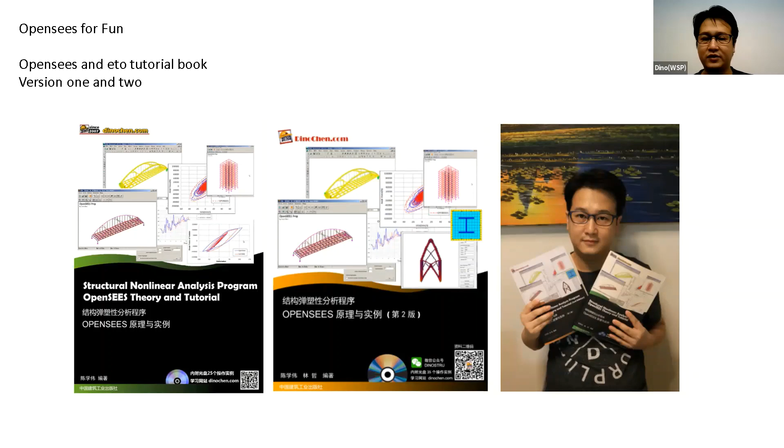In this book, I made a small program called ETO, which means Etabs to OpenSEES, to help students easily build OpenSEES models based on graphic input. It's based on Etabs graphic input and transfers the model to OpenSEES. This is the ETO program, and later I will give you a small introduction to it.

It's quite user-friendly for small scale buildings, and I can do quite a lot, for example solid elements and bridges for civil structure students who want to build large scale bridge models in OpenSEES.

For bridges, I also made a very fun program called the OpenSEES bridge game. You can build a bridge on a grid, similar to some popular games on iOS, iPhone or iPad. It's very useful because most engineers don't know finite elements well, or don't have time to build a finite element program, but they can use OpenSEES as the calculation core.

They just need to build the graphic input or some script to build the model, using OpenSEES as a core. They can build a lot of other functions like this bridge game I built.

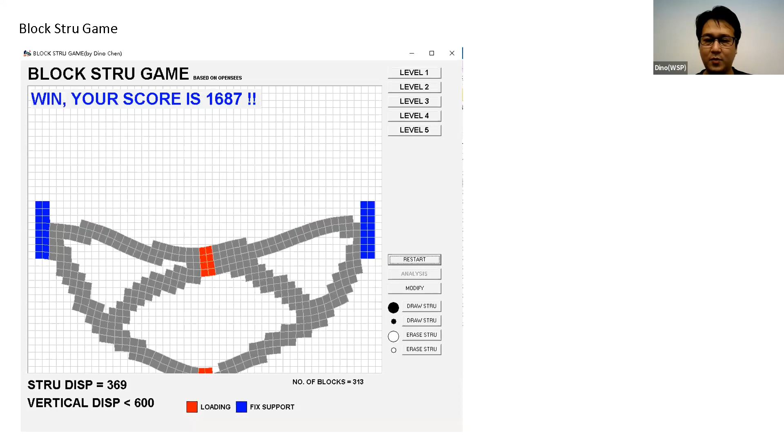Based on this theory, I made another game also based on the OpenSEES core to try to make this topology optimization program. But this is a manual topo program, not automatic, though it's quite useful to introduce students to the theory of topology optimization.

For example, this one has a point load added at the top, and the base two points are fixed supports, and this is traditional 2D topology optimization. This program is based on the block structure program, and all the calculation is based on OpenSEES, with no need to compile in C++. We just use the original OpenSEES script to form this program.

It's quite useful for you to do some fast study in structure. For example, I use this to optimize the outrigger in the high-rise building to gain the largest

stiffness based on the limit material. This program is also built in based on OpenSEES, and this is quite interesting.

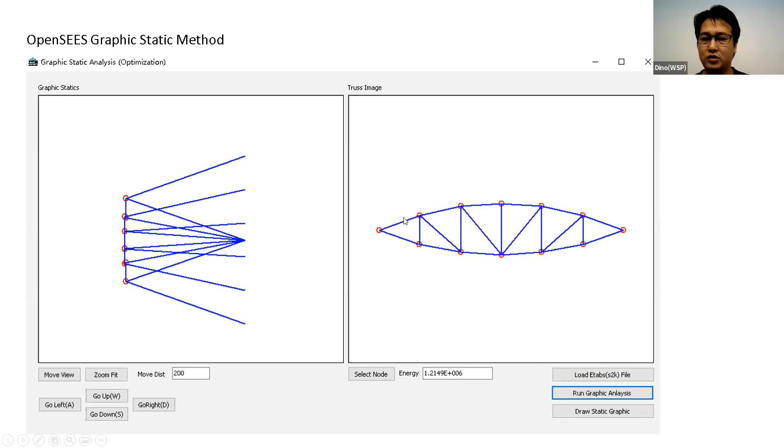So I will close this PowerPoint to show you the program I wrote and introduce some detailed theory behind the program.

Okay, for example, I'll show you the bridge game. This example, the ETO, I will introduce later. This is the bridge game, you can see that - oh, it's quite small.

In the graphic you cannot see the OpenSEES window, but actually when you build the bridge based on the graphic, the program will auto-generate the OpenSEES model. So we draw some truss here.

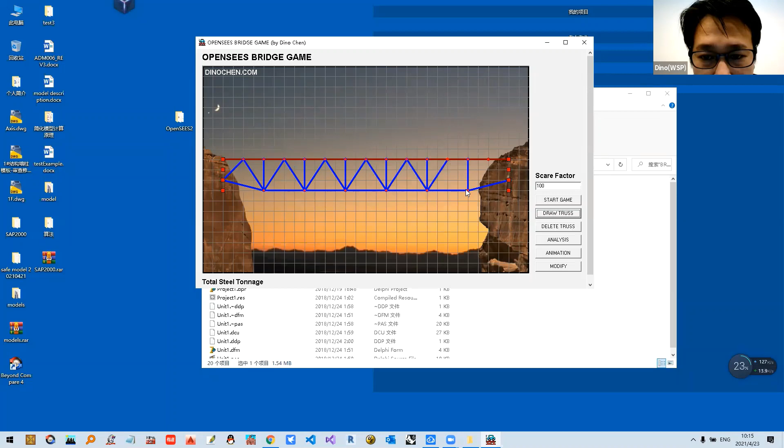Okay, and then we press analysis, and after pressing analysis, the program will run in OpenSEES. You can see this is the TCL file the program generates, and press analysis. You can see it's like a game - a bridge game based on OpenSEES.

And the theory is, when we press design and press analysis, the program will generate this TCL file. The model will generate the 2D node coordinates. The fixed points - these 4 red points are the fixed points. Then it auto-generates the information of the members, using the elastic beam column element.

And then we apply the loading. Actually, the tricky one is the loading assignment. For example, for this car going from the left to the right, the loading is applied as a point load starting from the left.

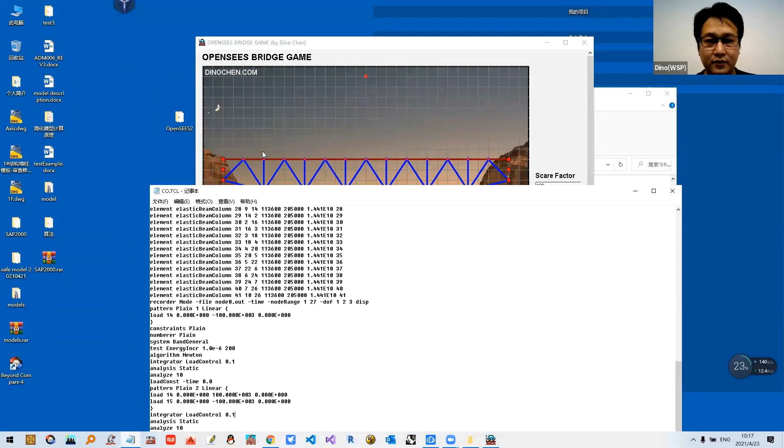Yeah, from the left here. We apply the point load at the left point, and then we apply the uplift load at the adjacent point or adjacent node, and then we apply the loading.

Each time we just shift the loading from the left to the right and iterate, and this is the loading pattern applied for the bridge analysis.

After you apply these several cases of loading, each time step we run the analysis, and then we collect the deformation data. You can see this one.

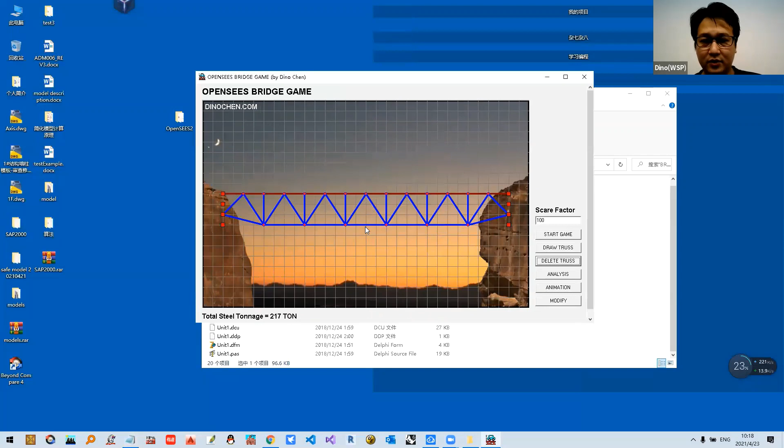This is the information of the result. You can see the record file is here. We just collect the deformation across all the nodes, the deformation of the 2D, so DOF 1, 2, 3. The final result we display on the program and show this animation.

So the theory is quite easy. It just runs, for example, for 20 nodes it just runs 20 linear analyses, capturing all the deformation at each time step and displaying it on the 2D canvas of the program, making this game.

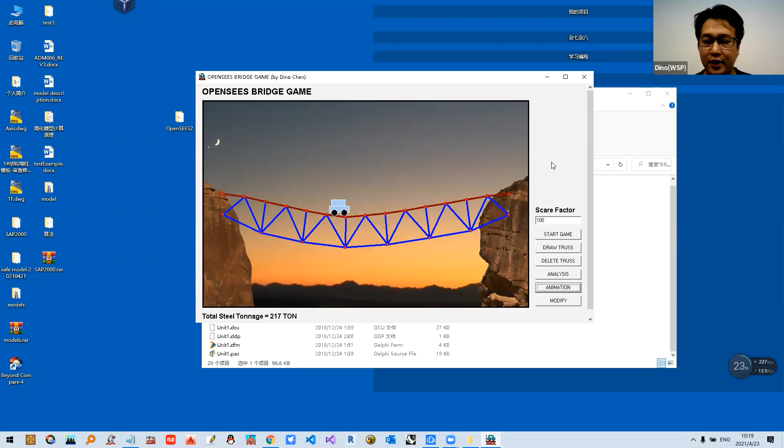So it's quite fun to make this one. It's quite easy to show how to use OpenSEES as a calculation core to make a 2D analysis program, including static analysis programs of all kinds. And this is the bridge game.

So, how about the block game? The block game is quite easy to use. I'll show this one.

This is quite a large program for OpenSEES, because for this program we use the shell element for each pixel of this canvas. For example, I set several levels for the game. This is the cantilever - the blue one represents the fixed joint of the member, and this one's the loading. So these 6 elements apply the vertical loading as a point load to form this structure.

So at the very beginning, I draw a very simple cantilever by dragging the mouse to draw this cantilever. It's quite easy. Then I press analysis, and you can see the program generates a lot of node calculation information. Close this one - I'll show you another program based on this.

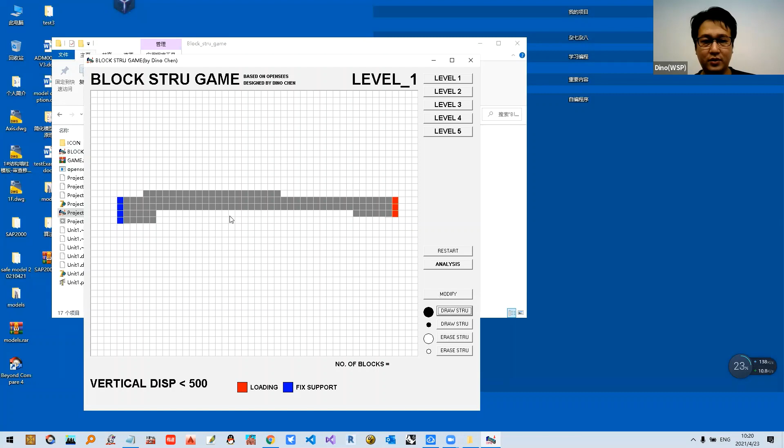Yeah, based on this one, this will show you the process. Will not delete the joint. Okay, I draw this cantilever and then I run the analysis.

You can see the OpenSEES run. This is the deformation of the structure, and we can see this is the result. We generate a lot of node deformation, and this is the script auto-generated by the program. You can see that most of them is the node location.

It's quite a lot of node information because it depends on the grid. For each member, you can see that it's a pixel in the graphic, but actually it's the four node shell element here. And then we have the fixed joint is the blue one, and any joint in this canvas we don't use.

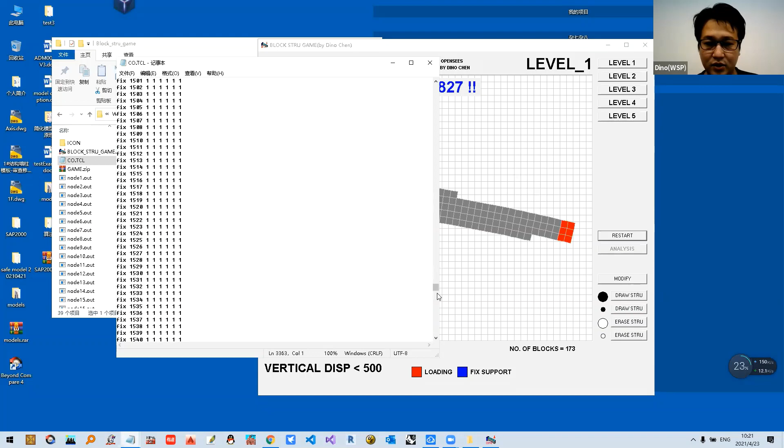We also assign the fixed joint for easy to program. And you can see that some part defines the pin joint, which is the element we use. We use shell MITC4 for all these elements, and then we record all the deformation of the nodes. We apply the loading at the red point, and then run the linear analysis. This is quite a long script, but it's very easy to understand this part, the analysis theory.

So how to build this model is just use the brush. It's quite fun here. You can teach students how to use the brush to optimize the structure.

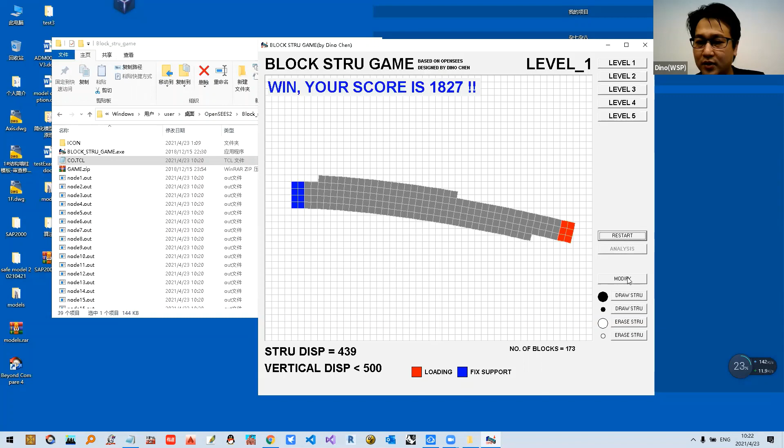I'll show you a much more complicated structure. For example, I clean all this one. You can use the eraser to erase the member.

Okay, for example level 3, this one, we can draw the truss structure like this. This is the structure, but the loading, I think, is horizontal. No, the vertical. Let's run the analysis.

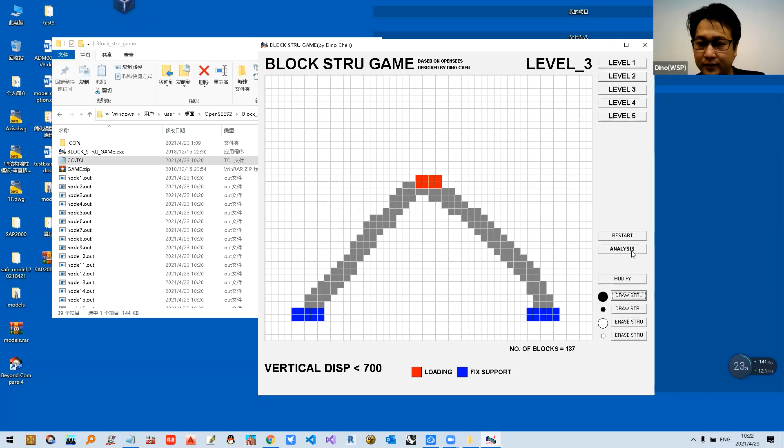You can see this is the vertical point compressing this point, and the structure deforms like this. So we're not satisfied with this deformation, so we maybe add two truss members like this. Just for example, it's not optimized.

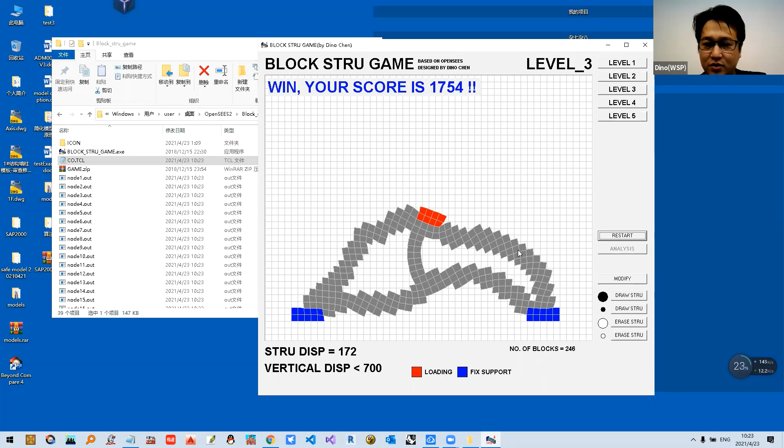Then you can see the score is calculated based on how many pixels you use for this structure. Now the score is 1754. I think it's not okay also, so maybe we draw more structure members like this.

This is the process of how to use the brush structure. We can also understand this as handmade optimization. Use the menu, and this is a block structure game.

Based on this theory, I transferred the program to be the Topo optimization program like this. And this is the model. It's much larger than that one, but it's the same theory.

We just run, for example, 0.01. This is the reject ratio for the member. This red point is the horizontal load ending point, and based on this, two points are the fixed point of the structure.

So at the very beginning it's like a shear wall, a 2D plate structure. We apply one point load and review the lower stress area. After we press Read Stress, we can read that this is the high stress zone, so we cannot reduce for this 3 point, but in the middle we can reduce because it's a low stress point.

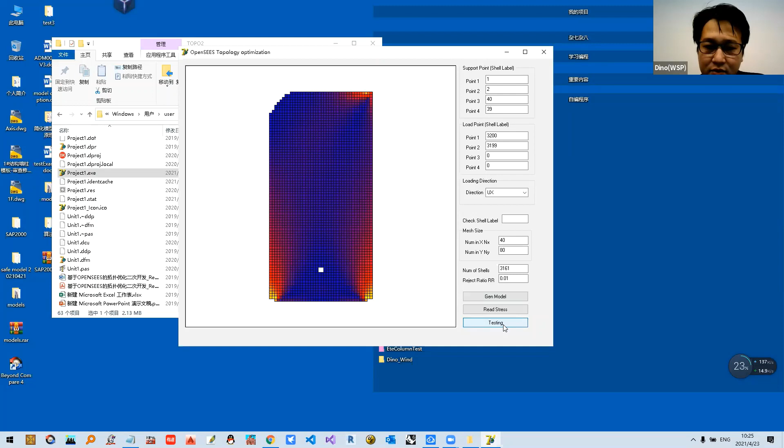And then we just double click testing. It will reduce the shell element. You can see that this is the lump sum of the shell element. And then we can increase the reject ratio, and we'll do it again and again.

I can show you the final result of the Topo analysis. This is the story script document for this program, but unfortunately it's in Chinese. I have no time to translate, so I just open this PDF.

You can download it from my website. It's quite detailed, describing the theory and also the script.

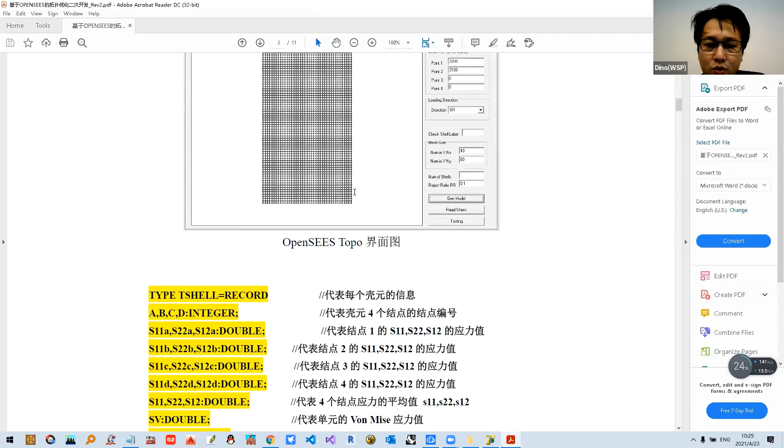At the very beginning, we just build like a shear wall structure with a lot of elements. The element should be very small because we need to use the average stress to represent each element. So for this program, I used Shell MITC4 also.

And then this is a regular script for the linear analysis. We just need to know the topo procedure of the analysis. We generate the OpenSEES model, we run the OpenSEES model, and make the TCL file.

And then we read all the element output, meaning the stress of the element. We combine the stress to be a Von Mises stress, and calculate the maximum stress, meaning the Von Mises stress of the element. We check the element's stress limit, and we calculate the rejection ratio of the max stress.

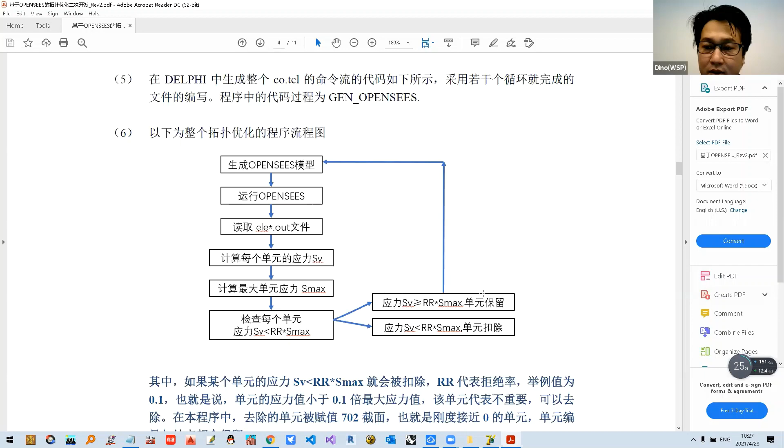For example, at the very beginning, you can see that the ratio is 0.02. It means we calculate all the members to gain the maximum stress, for example, like 10 MPa. Then we calculate the rejection ratio of the maximum stress rate stress, and check the stress limit, like 0.1 MPa. So for each element, if the stress is lower than 0.1 MPa, the element is considered to be reduced, and the other parts remain. So we just reduce the element, and after several steps, we can gain the topology optimization shape. This is the whole process.

We apply the point load at the top and the middle point, and the base is fixed support. Then we run several steps and gain this result. Finally, we gain the topology shape like this. Yeah, and this whole procedure is based on an OpenSEES script, no need to compile a C++ program.

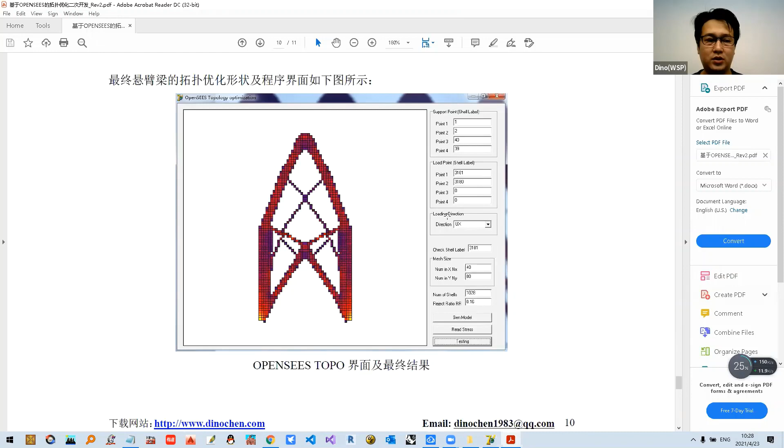Okay, and the other part of the fun program I introduced is the graphic static, I think it's here. This is quite useful for high-rise building or long-span structure analysis. Let's see. Yep.

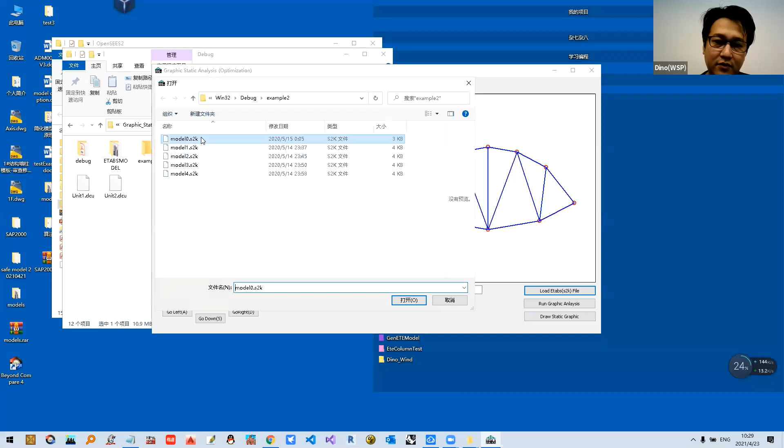At the very beginning, we also used OpenSEES, so we keep the code file here, but it's quite easy because it's 2D truss analysis. So at the very beginning, we also used ETABS to be a graph input. For example, like this truss, but this is not a regular truss. Yeah, this is a regular truss.

I think you can use YouTube to find the graphic static theory. It means using the graphic to calculate all the internal force of the member. Actually, at the very beginning, it's a very easy method to calculate the actual force for the member. But nowadays, because we have the finite element method, the truss internal force is very easy to get by the program. But this method is still useful for structure optimization.

So for example, for this normal truss, we can run the graph analysis and gain the graphic static figure. And as for how to use this for optimization, I can show you. For example, for this truss, you can see that we make sure all these lines represent the axial force value. The direction is the vector, but the value is the length of this one.

And you can see that this is the optimization of the truss. For example, if I use this one, set this point, yeah, the normal truss is like this. Sorry. Yeah, this is the normal truss. When you run the graph analysis, you can find that the total length of this axial line is a certain value. For example, you can call it the energy factor, which is 1.229 here.

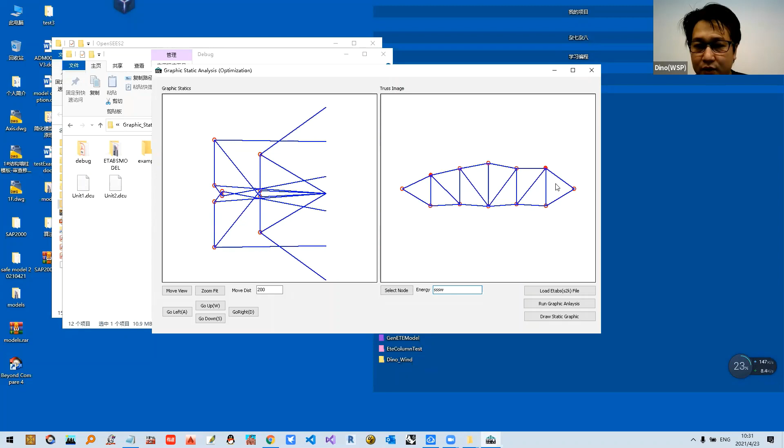So this is not the optimized shape. So we try to move the node of the member, for example, to reduce this one, and make this middle one higher. Change the shape like this, and we can gain another graphic. So you can see that the graphic is squeezed already, the graphic static figure is squeezed already, and the lump sum energy is reduced. So it means this structure is much more efficient than the one before.

So we try to use this one to make the truss optimization tool. Actually, at the very beginning, it's based on OpenSEES to try to make a demo or beta version. After we confirmed the theory is okay and easy to use by the engineer, we transferred it to be the program itself. We rewrite the analysis code, we don't rely on OpenSEES now. So this is the application of OpenSEES.

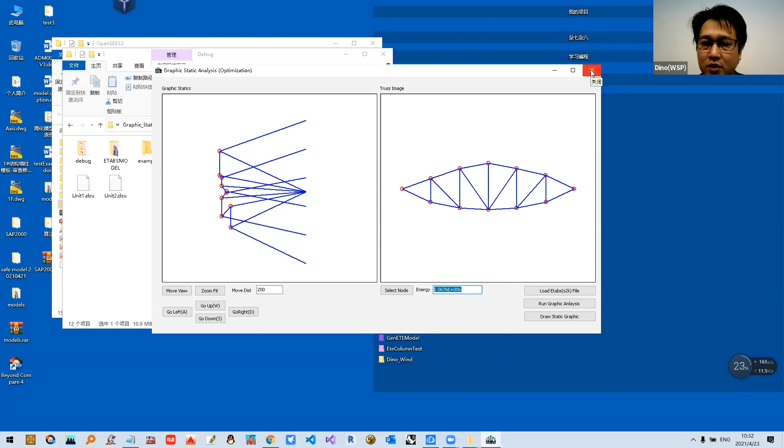Use the OpenSEES script. So, and the other part of the introduction, I think the most important is to introduce you to the program called ETABS. Actually, for most projects, even in China, Hong Kong, I think maybe in Europe or the USA, the program called ETABS is quite popular. I think it's worldwide popular, this program.

And then we try to use ETABS as the operation system for OpenSEES, because you can see that the OpenSEES program is most likely a script writing program for students to run specimens or run tests, like a seismic test or loading test for the specimen. I think it's quite easy to build a model because the model itself is simple.

But for the structural engineer, we need to build a very complicated model, at least several story building. It's very difficult to build in the script. So at the very beginning, we try to use SAP 2000, but at last we transfer to Etabs because Etabs is much more popular and most engineers know how to use it.

So I'll show you how to run the ETE program based on Etabs, from the Etabs model at the very beginning. If you want to use the version of the ETE, you can download it from my website. I can show you the download address, press OpenSEES at the very beginning.

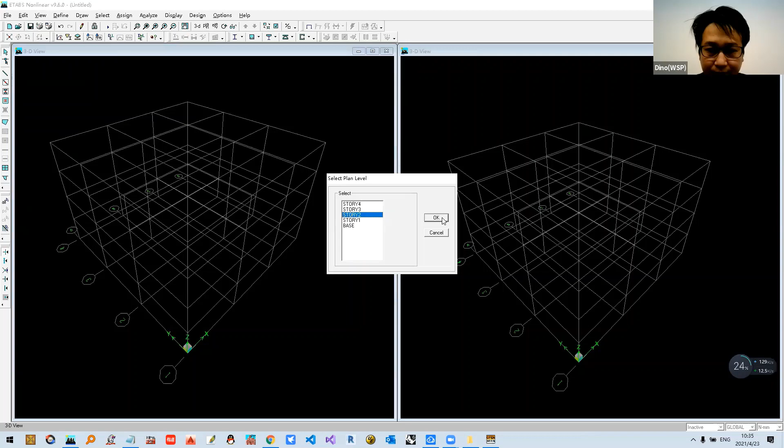So I build a very simple frame structure here, using the default setting with several grids. I build this using the total graphic input for Etabs. Okay, concrete section. So I assign the section to be the concrete section.

Actually, we need to use an elastic member, so we call the E at the header of the section, to automate changing it to the elastic section. Assign the column and the beam, and then replicate to the other floors.

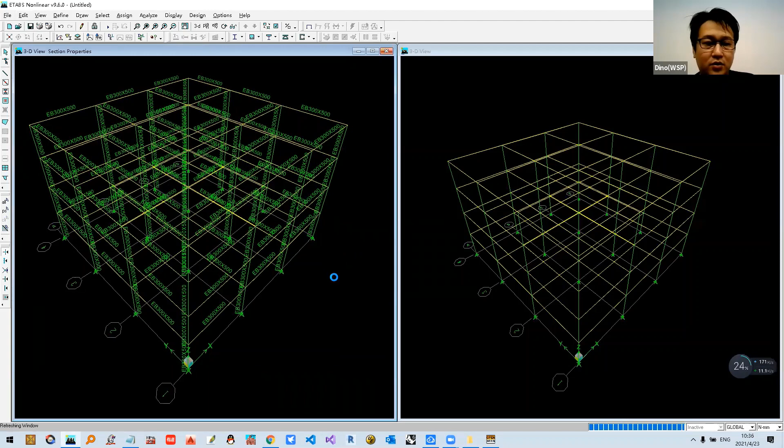So the building is built already, and then we assign several point loads as a push load. I create a load pattern called push, then apply the point load as a push load at the top, for example 100 kN. Okay, and the model is built already in the graphic input.

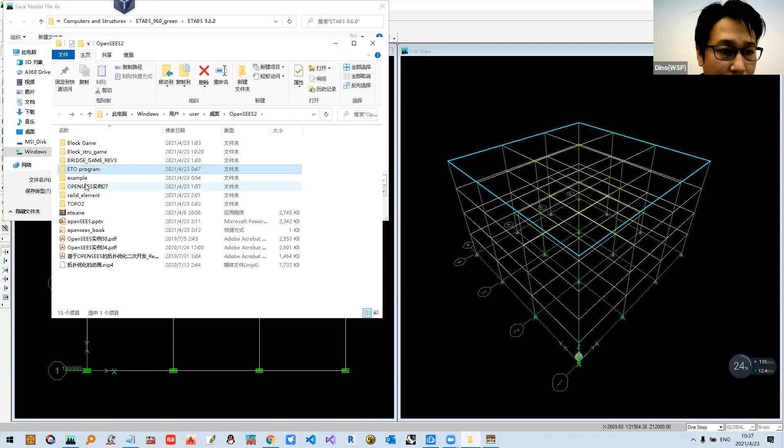It's quite easy, and then we save the model first. For example, save it here. Be careful, we need to export not the E2K file, but export the SAP 2000 S2K file. And then we save here as S2K - this is a very important file, because we import using the S2K file, and then we import this S2K file.

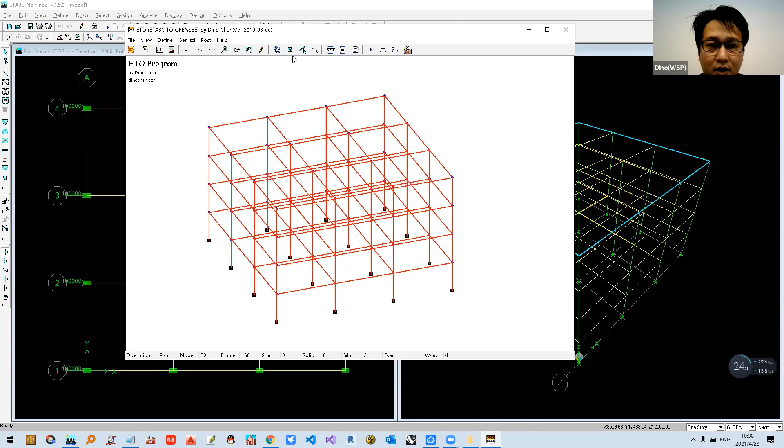This imports from the Etabs model, and then you can rotate the wheel to show the 3D shape of the building. You can also show the node number - it's quite important because we need to know the node number, and we need to know the frame number.

And this - we know that for OpenSEES, the local axis is quite complicated, we use vectors, so we also need to know the vector of the member. This is the vector - we describe the section rotation, section angle for the member in OpenSEES. But don't worry, we will try to handle this.

We use ETO, we will transfer this local axis automatically, and we try to use the fiber element to define the fiber element here. But at the very beginning, we do this tutorial using the elastic model, so we can select the elastic beam to describe this element. So you can see the element label - this is the element.

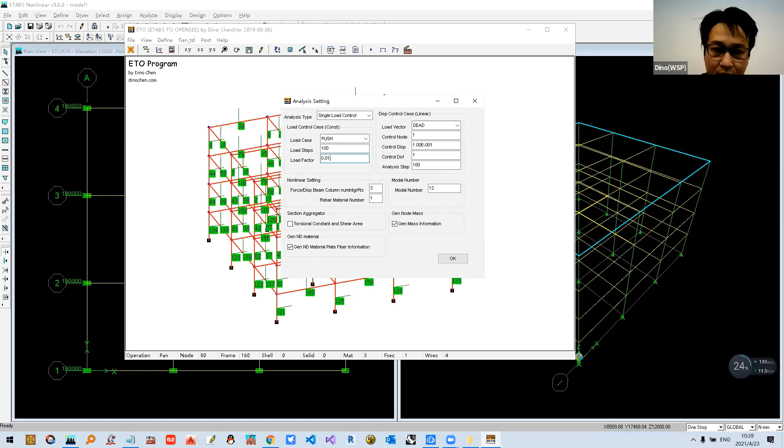And then we set the analysis case - actually for me using ETO, I will use the tcl file to modify this part, but for the beginner user, you can use this one to auto-generate the analysis tcl script. For example, push load 100 steps, this is the load factor for each step, like 0.01. Then press OK, and you can press this text file and auto press generate.

You can see this program will gather the information from Etabs to generate the information for OpenSEES. This is the model basic data, node information and mass information, auto calculated by Etabs if you need to run the dynamic analysis. And the fixed or pin connection of the support point is also transferred from Etabs, so you can define fixed or pin support as you want in Etabs.

And this is the elastic member description, the material, and the shell element - with shell element for the wall and slab, we transfer to the ND material automatically. But in this example, you don't need to use that. And this part is much more complicated for the beginner - it's describing the section rotation or section angle for the 3D section.

We transfer to the geo transform linear for each member. So if in this model there are 1,000 members, there are 1,000 like this one description, but for the computer it's quite fast to input. And this one is the member description - we can transfer this one to be a nonlinear member.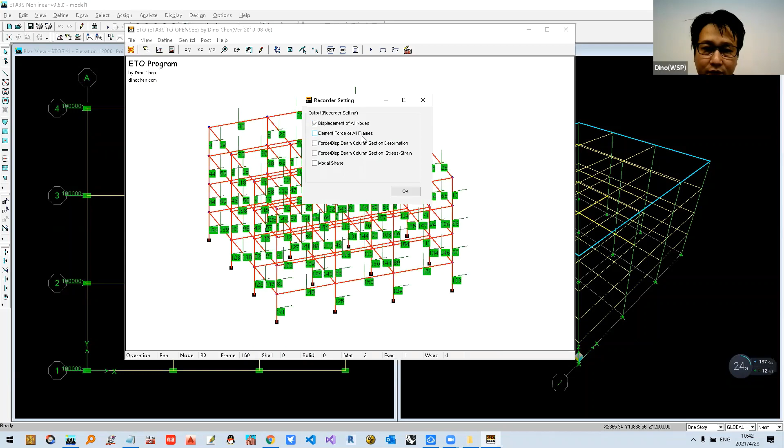And then after that, we could record the file. For the output, we can see that we just click the deformation for all nodes. We also can generate the element force for the frame, and the other part you can handwrite for the other recorder you want. And the push load is transferred from ETABS. You can see that in the X direction, apply 100 kN for the top 4 points.

And then the other part is the analysis script you usually use. This part you can modify manually, by editing the text. So you can generate this. After generating this one, we can save, select all to save the text file. For example, you can also press save file to the script.

And I'll show you how to run this script. The thing is, the OpenSEES program. For example, you see that this script is generated from that one. I just keep 100 time steps for this analysis.

And we can use the program ETO to plot the deformation also. We can import the model here. And then we run. Yeah, maybe this is not the same model again.

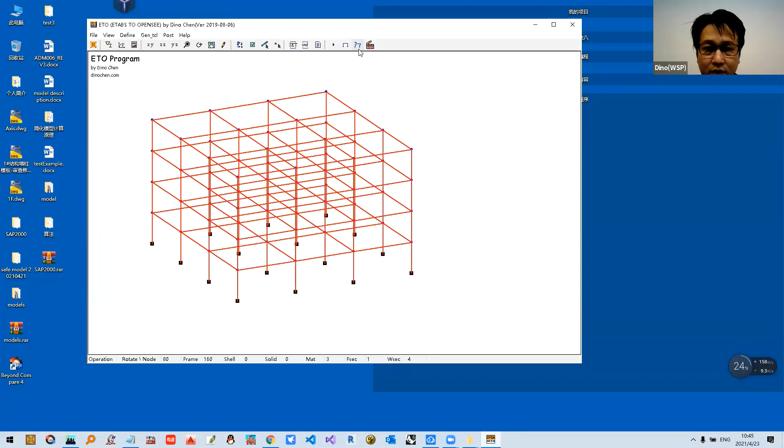For example, we read the deformation based on the node output. Time step is 100 maybe, and the scale is 100. Just for example, yeah, so it's not big enough.

Yeah, this you can see the deformation. The scale is 10,000. Okay, also you can show the animation.

This is a new function I added recently, and time step. Yeah, it's okay. And then not here. It's quite... you can see the animation.

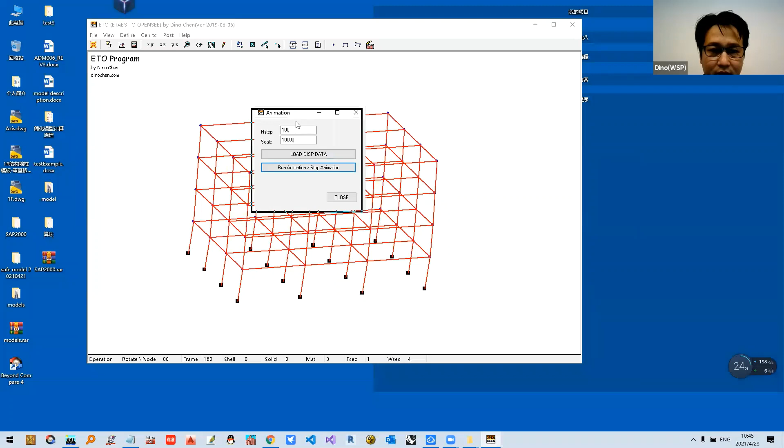For the presentation, like in a paper or PowerPoint, to describe the information in the research, I think this is a useful tool for them to do the post-processing for OpenSEES.

Also in this program, I can also show you ETO's other functions. I think it's most likely for the geotech student, the research of geotechnical analysis. They mainly want to use the solid element for OpenSEES, not the frame element we use for structural analysis.

This one can also do it, but unfortunately ETABS cannot model the solid element, so we need to use SAP2000. You can find the example here on the website.

Not this one, sorry, I think it's 30. Oh, I'll show you the website. Solid element, I think the sample is...

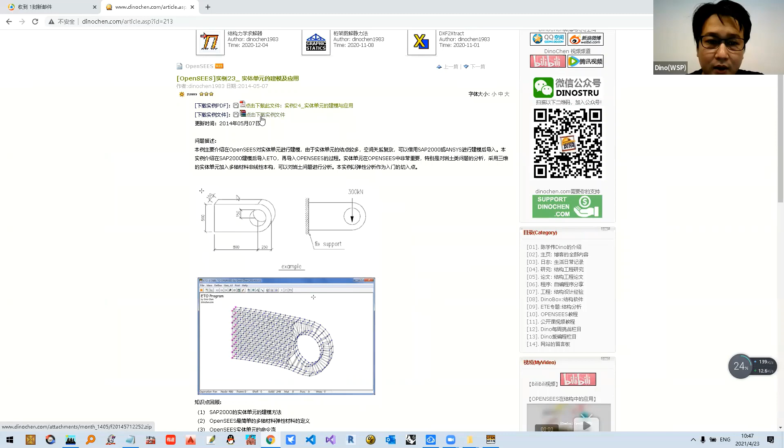I see. Okay. Yes, 23. I can show you the PDF.

Oh, I see the scroll bars here. There's quite a lot of different types of analysis in the textbook.

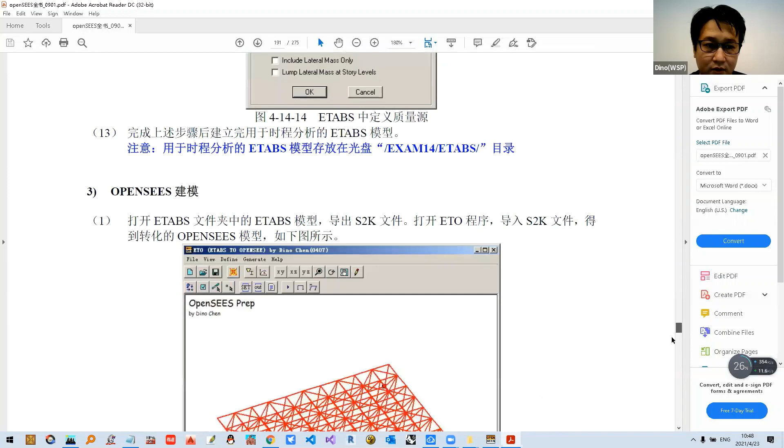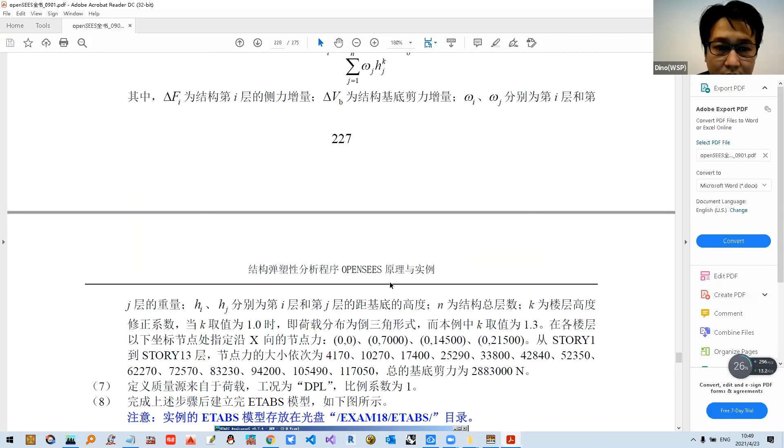18. 21. Yeah, 23. Okay, in SAP2000.

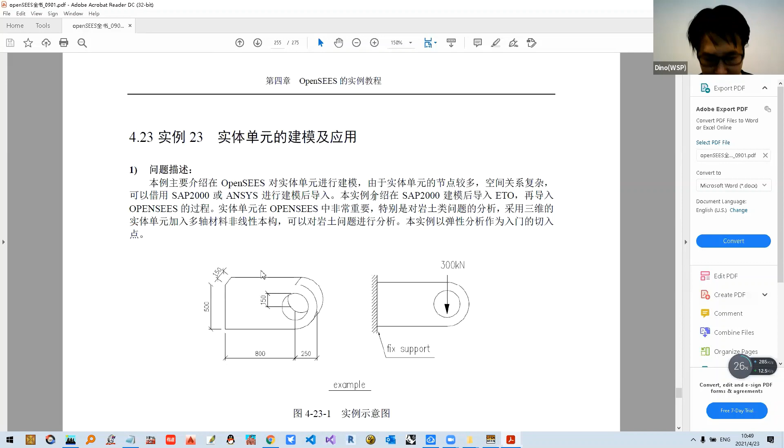Yeah, this is the problem description, and we need to run this solid element analysis, applying 300 kN on this point. This is the solid element.

We use SAP2000 to build this model, and then we transfer it to ETO like this, and then we also generate the model by ETO.

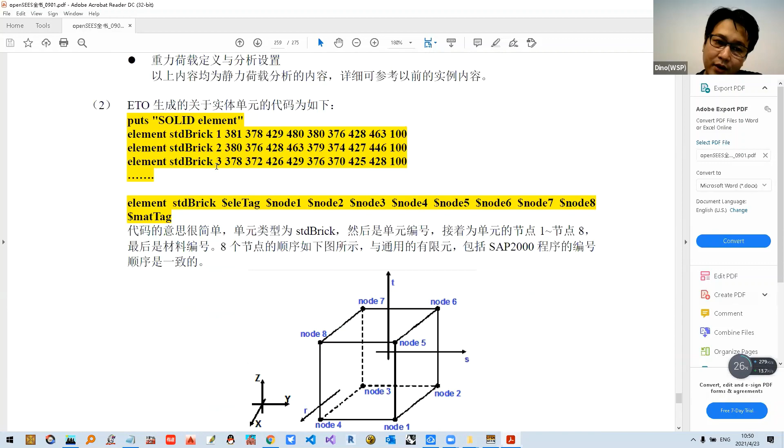In this model, we use the STD brick element, which I think is an 8-node element, and then run the linear analysis to try to make OpenSEES be like Abaqus or ANSYS program for running solid element.

But also this one can be used in geotech research, because geotech also wants to build quite a lot of solid elements, and I'll show you how to use this case.

I think here, yeah, at the very beginning we use SAP2000, and then we have, sorry, here, solid element. So you can see SAP2000 is the... I can show you SAP2000.

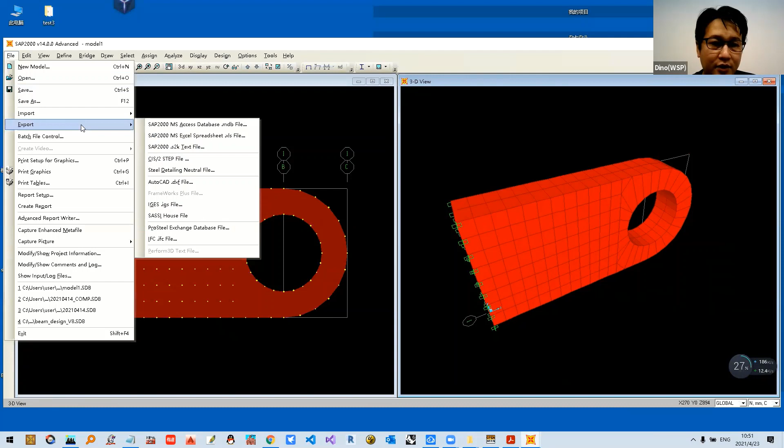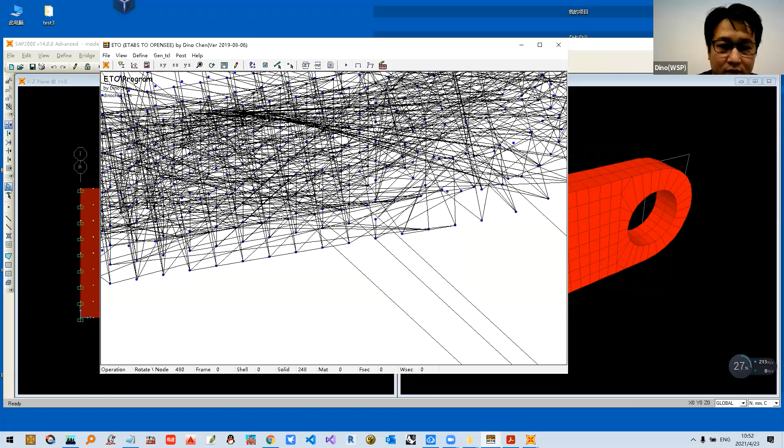Yes, okay, yeah. Then we set another version, SAP 12 for example, and then we import from the model. Oof, I think something's wrong here. I think it's a unit problem. And then we just describe this example.

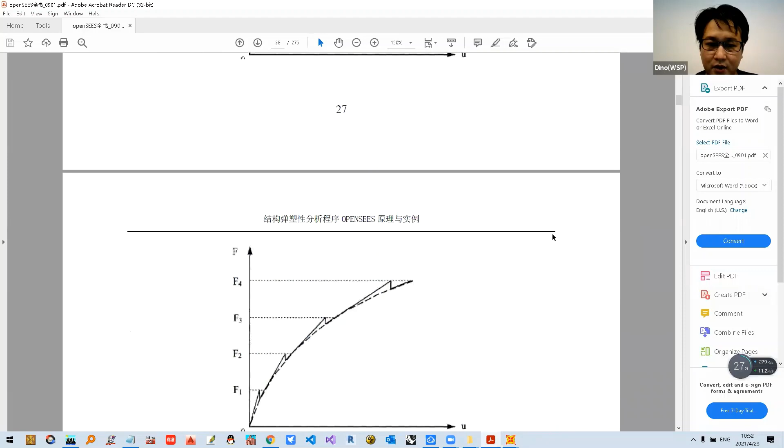Okay, and I think the presentation is most like this. Can show you some pictures, because this textbook is in Chinese, but I can show you the pictures from the tutorial of this book, my textbook. For the very beginning, there is some basic theory of OpenSEES, especially the nonlinear element. It's like a normal textbook, but after this part, chapter 3 introduces the ETO program to introduce how to build the model in ETO. And this is the introduction.

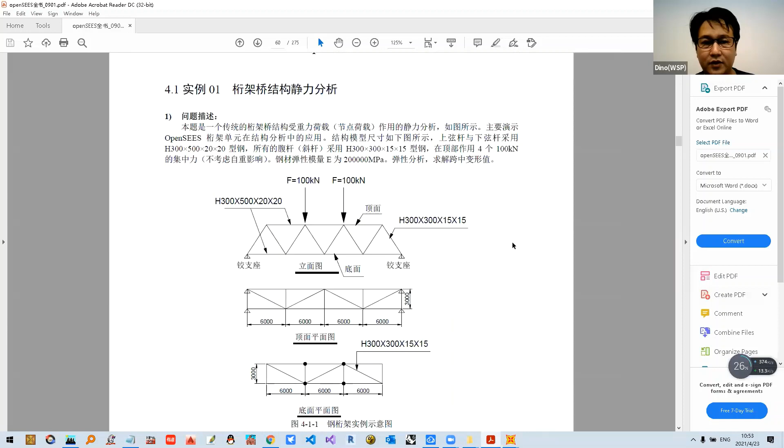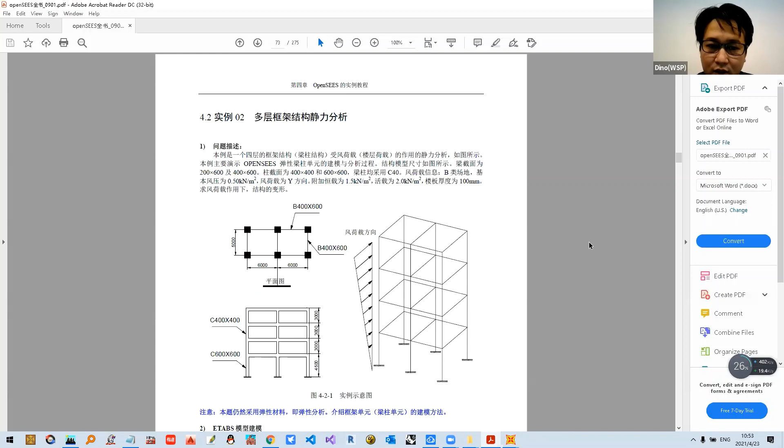And at the very beginning, we have tutorials from 1 to 20. I think now the textbook is up to 35. So in the textbook, tutorial 1 is the truss structure, like a bridge truss. Tutorial 2 is the frame structure for elastic analysis, and also teaches how to use the rigid floor diaphragm in OpenSEES.

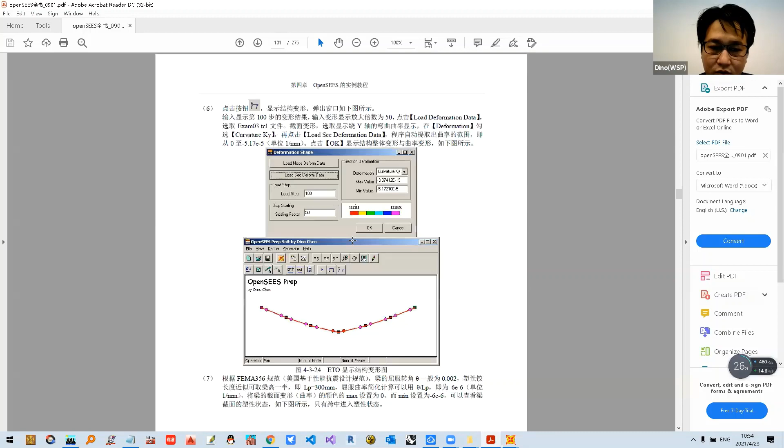And then we teach how to calculate the local axis, or also called the local vector, for the section rotation. And then we have the plastic hinge model for simple beams, a simple support beam, but it's nonlinear. We show how to model the plastic hinge.

And for examples 4 to 6, I think it's the frame structure, including pushover analysis for the frame structure, and nonlinear analysis for pushover to generate the pushover curve. Example 5 is modal analysis to find the natural frequency and mode shape for the building, also using ETO.

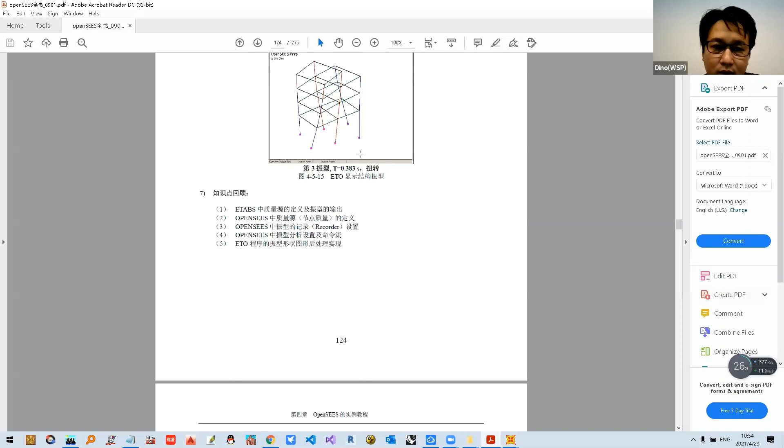And tutorial 6 uses time history analysis, but it's an elastic model, to run the time history analysis and teach students how to import the time history ground motion data into OpenSEES and define the damping ratio for the building. Here is the Rayleigh damping theory.

And example 7 is the critical one, the nonlinear time history analysis example, also based on ETO. And then example 8 is a pure steel structure, like a structural brace. For the brace, we consider the

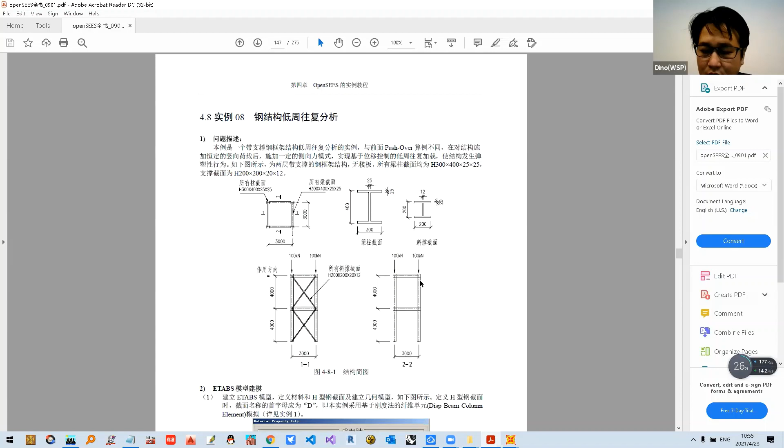geometric nonlinear behavior. So you can see that we divide the member into pieces. And then we try to introduce cyclic loading, push and pull, and run the model considering geometric nonlinear and non-geometric nonlinear.

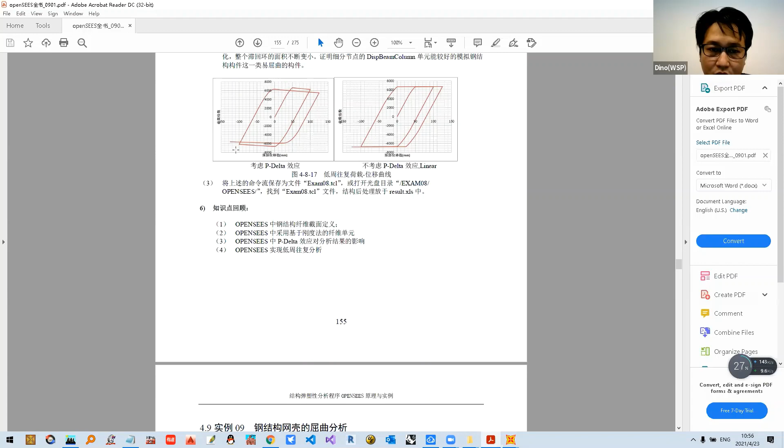And we also try to introduce using OpenSEES as a geometric nonlinear analysis tool to run the large deformation analysis for members like a shell truss. This is the shell truss; we can find the jumping buckling.

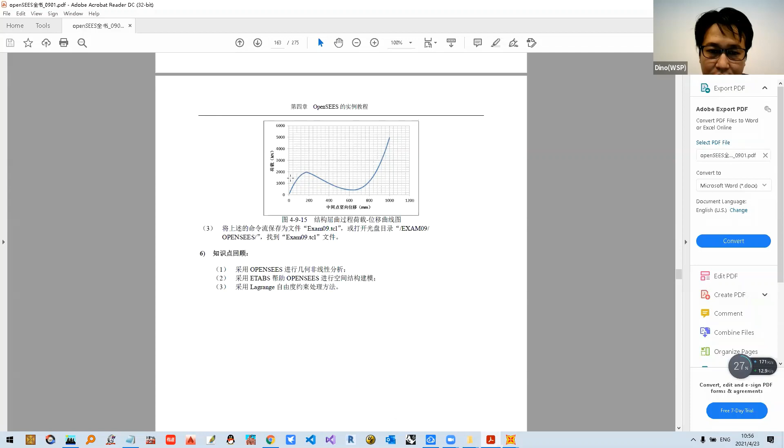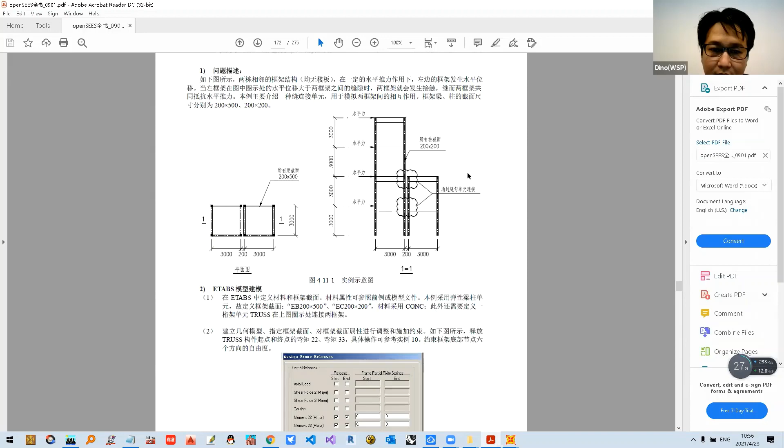We also introduce some very simple nonlinear members, like only compression or only tension link or truss. This is for a foundation, only compression link. And for the gap, we also introduce how to use the gap here. And to introduce how to use the hinge in OpenSEES, which is quite different between OpenSEES and Etabs/SAP2000 for how to treat the hinge situation.

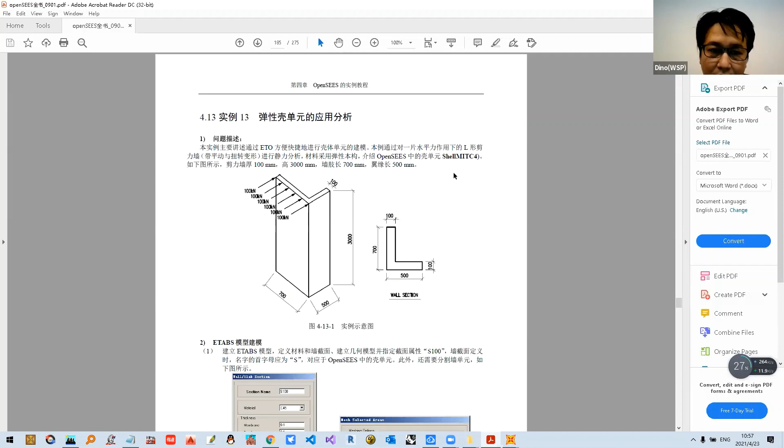But we can use ETO to very easily model the hinge, the pin. We also teach students how to use shell elements. This is the elastic shell, I think it's MITC4, and build a very complicated truss model using 3D truss, which we call a web truss in China.

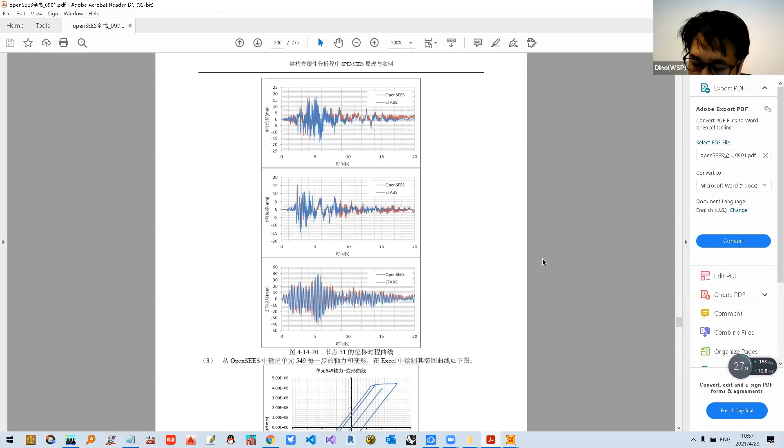It's quite common. In this model, we also introduce 3D, three-direction earthquake loading, like UX, UY and UZ, to run linear and nonlinear analysis for the space structure. And also the prestress beam, using OpenSEES prestress beam, and the bridge.

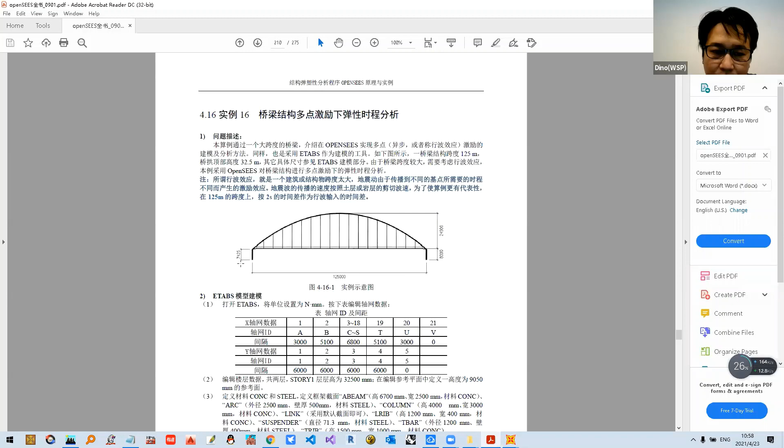And from this one is a civil structure like a bridge, this is a long span bridge. We consider two joint supports with different excitation, so we modify the earthquake input transferred from one point to another point, with a different start time.

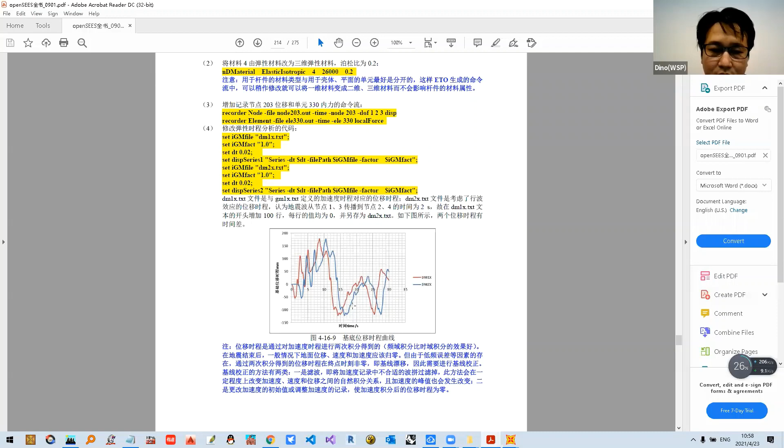And then we have this complicated model, also built in ETABS and transferred to ETO. So even this model can be run in ETO by transferring the script from ETO to OpenSEES. This shows the two deformations of the two supports, modeling the base displacement starting from different points. It's quite complicated for this example.

And we use shell elements, and this one is the displacement-based nonlinear beam-column element, to model the shear wall. It's not the... sorry. Okay, and the shear wall.

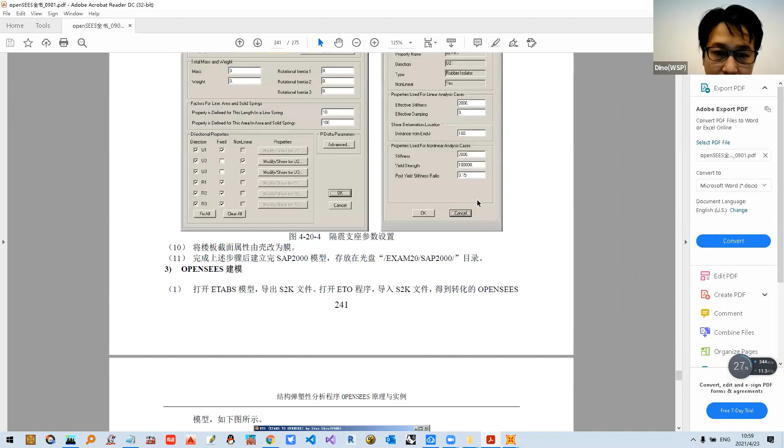This large-scale model is to build the frame shear wall structure. For example, you use the ETO to build this several story building and run the pushover curve. We compare to Perform 3D to make sure the calculation is correct. This example is for a building using a viscous damper.

The other part is comparing with Etabs, using a viscous damper. And the 20th example uses the isolator in OpenSEES.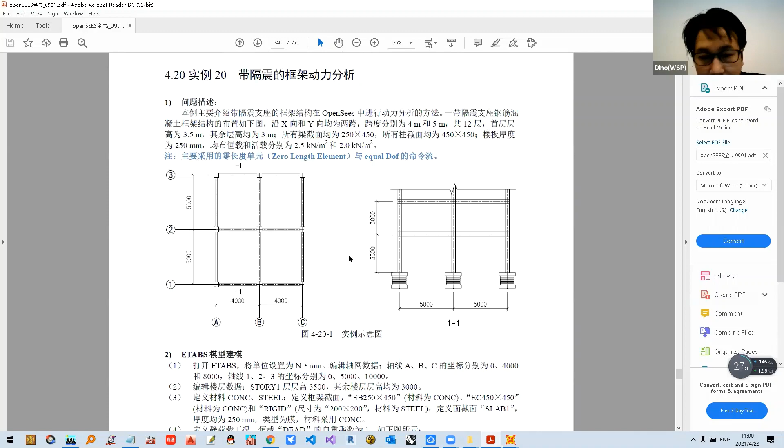The other part is how to make OpenSEES secondary development as the calculation core, for example, to generate the spectrum from the ground motion data. And the other one is transferring OpenSEES to be a PM curve analysis tool. This is the old version of the PM curve generated from OpenSEES.

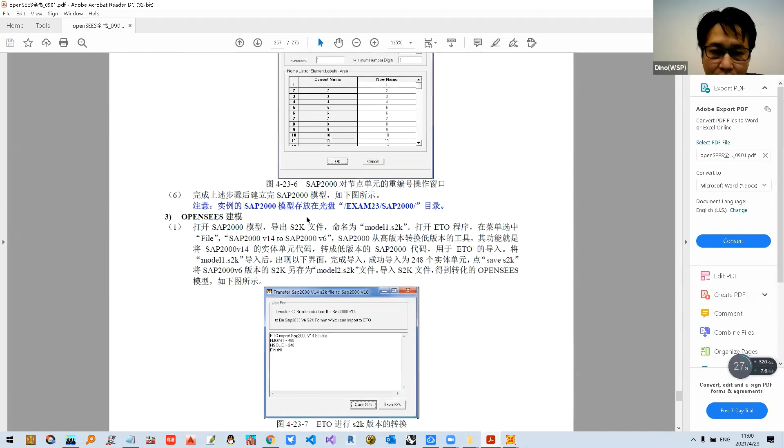And for the solid element, we already introduced to you using SAP2000 as the peer model tool. We also use SAP2000 for the 3D steel joint. This is very common in structural analysis - we need to build a steel connection to verify the stress limit for the steel joint. We also use OpenSEES as a tool to analyze this one.

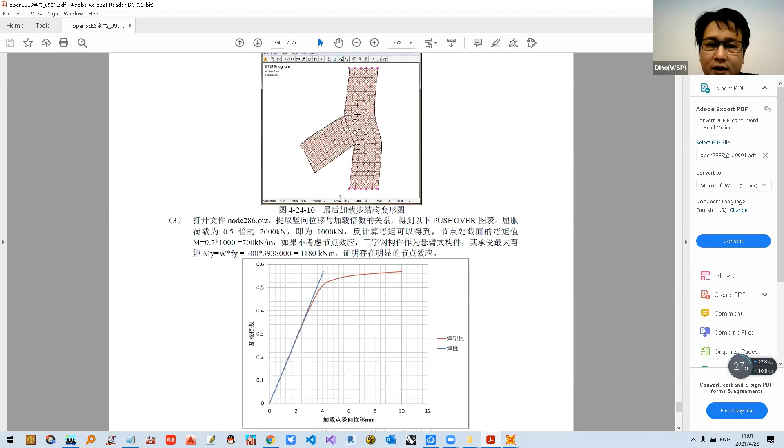We also use ETO to build this complicated shell element and run the nonlinear analysis to justify the fixed connection of this joint.

And the large-scale bridge model - this bridge model considers how to calculate the influence line for the bridge. I think it's quite a large model in my textbook. This is the version 1 textbook, the content of the version 1 textbook. I think it's quite a lot of content.

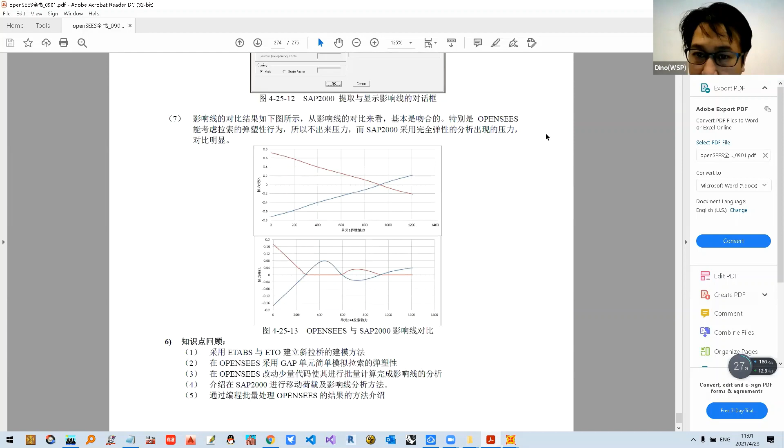If you're interested, you can browse my website. There's quite a lot of tcl files on the website and model descriptions on the website. So I think, Pavan, I'll hand over to you.

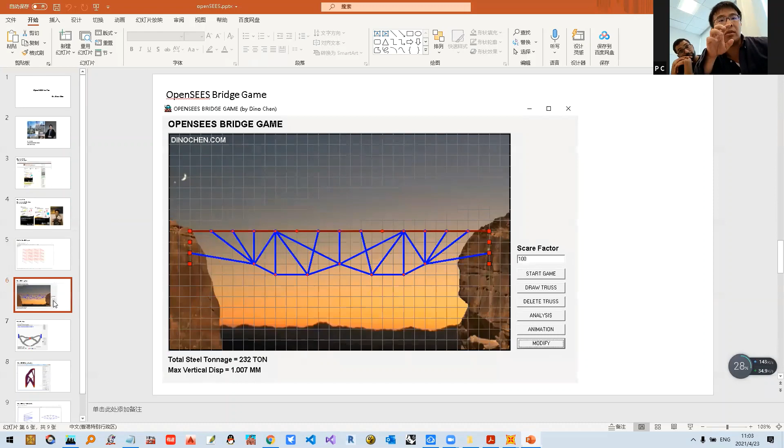I have a question after hearing your presentation. For your second tool, that shell tool - I wonder what material you used for this? I think you used... let me double check. The main thing is a steel element, elastic steel.

Okay, cool. Thank you. Do you have any other questions? No, any other questions?

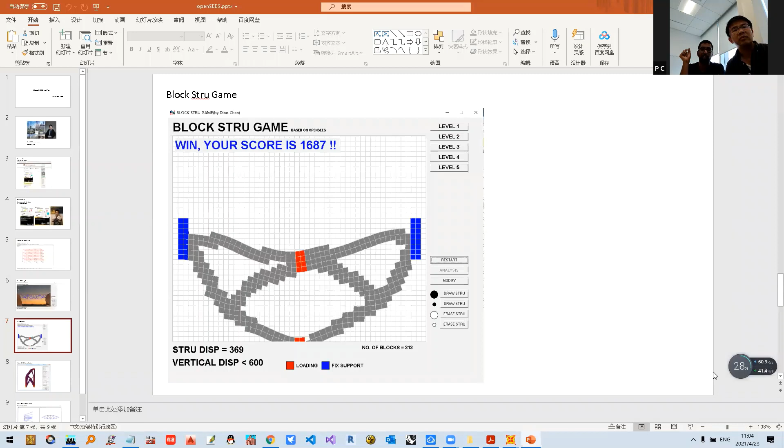So I'll ask you a question. I was curious, when you use the Etabs to OpenSEES conversion, you made your model in Etabs - how did you convert that into the OpenSEES code from the Etabs S2K file or whatever you used? Can you explain that, please?

After we build the Etabs model, Etabs will generate the model as an S2K file. I can open this file. This is from Etabs - it's quite an old version SAP2000 format, but it's quite simple, quite similar to OpenSEES.

You can see this is the joint - we can transfer all the joint information to be node information in OpenSEES. It's quite the same, and the fixed support, you can read the restraint, it's quite similar. The mass is also quite similar compared to OpenSEES and the S2K file. But this S2K file is from Etabs, not from SAP2000. You can see the frame file is quite exactly the same as OpenSEES.

So we find that among quite a lot of different models, the S2K file is much closer to the tcl file in OpenSEES. So we built this tool to transfer it. So how did you transfer this to the tcl file?

I used a program called, at the very beginning we called it Lazarus. It's a Pascal language program to read the file from the S2K file to the tcl file. I think now you can use Python - it can also do this procedure.

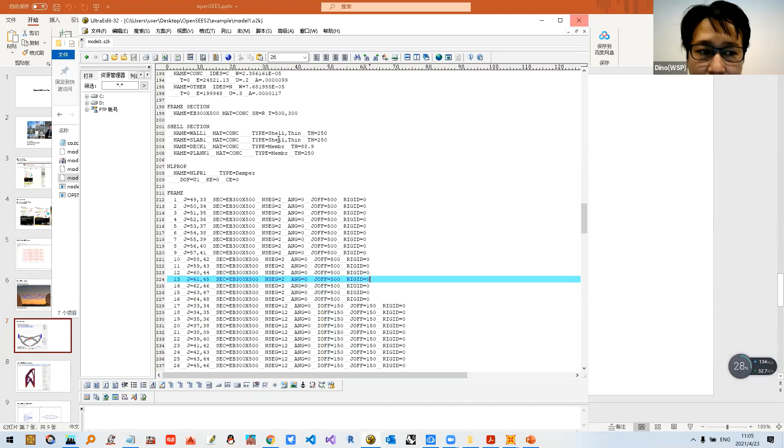The complicated part, I think, is generating the geometric transformation data like this one. It's much more complicated for this part, but the other part is quite easy. At the very beginning, as a student, we used an Excel file to generate this model, but the efficiency was quite low, so we transferred it to a program.

So how did you get the geometric transformation part, like the code for this one? How did you automate this part, the geometric transformation part?

We just read the information into the program as objects, for example the node and the frame. Then we rewrite the format of the output - it's quite simple and direct to generate this part. You can find that each number is the same, it's just the format that's different.

For the geometric transformation, I described it in the textbook. We used a bunch of cosine sine methods to transfer it, but I can't quite remember the details - I can show you the text here.

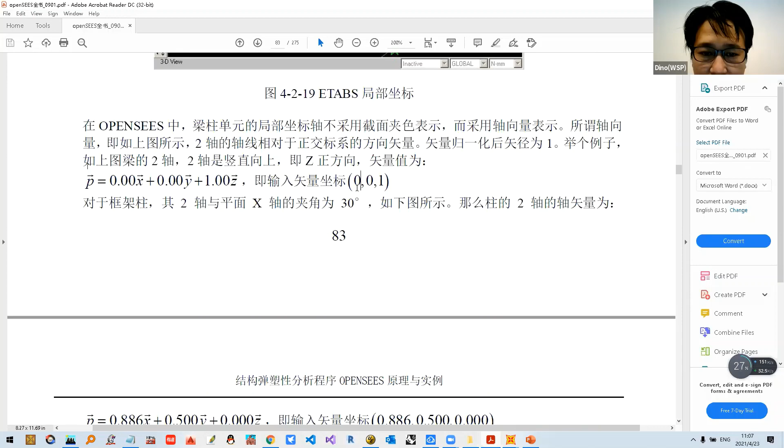Yeah, for the vector and for the Etabs, they only have one parameter called angle, degree of the angle. And then we need to transfer to this vector we call the unit vector for the transfer. We just need to calculate by this side, like a cosine sine method.

For example, it's 30 degrees. We calculate this part, I think it's sine 30 degree, and this is cosine 30 degree and sine 30 degree for the column.

And for the beam, we need to rotate to another axis from joint I to joint J to calculate the other angle. This angle is a 2D angle. We call it alpha, and the other angle is maybe beta. So it's a combination from a cosine sine equation based on two angles, one is the section angle, the other is the line angle, to calculate the geometry vector.

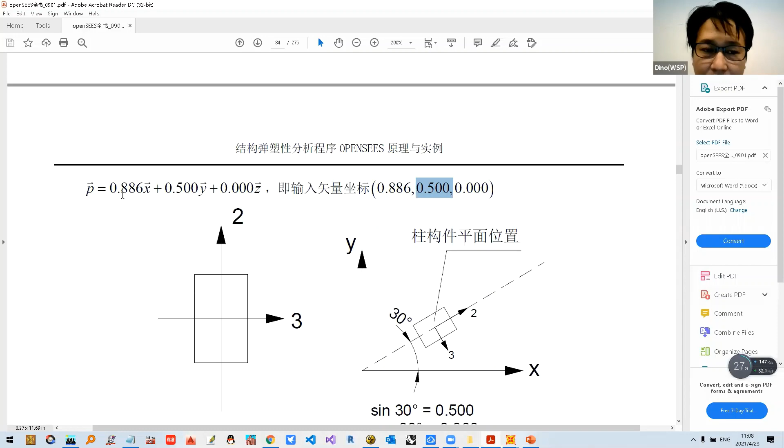I think we have a calculation equation based on the global axis, where the Z value represents the elevation height as Z coordinate, and then we have a calculation equation. I'll show you later maybe.

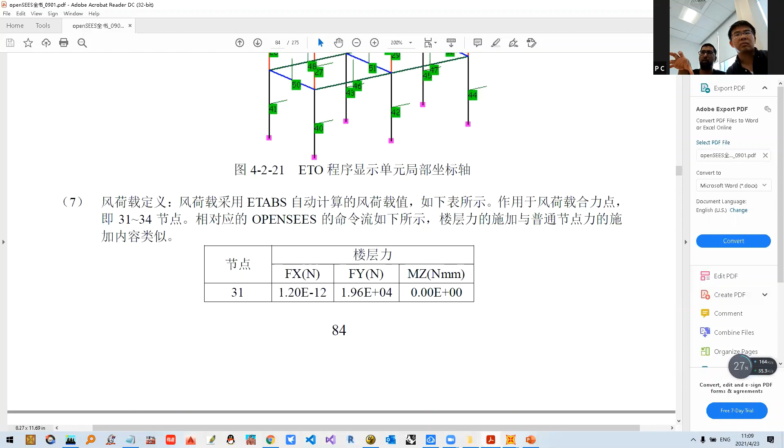And the ETO itself, once you loaded it into the ETO, your own tool, how did you make that tool, using C++ or Etabs? Oh, you call this program actually.

Yeah, the ETO thing, I use Lazarus. It's an open source program. Yeah, it's quite nice to build a graphic program, but it's based on the very old language called Pascal.

So using Pascal, you created that interface where you can do the deformed shapes and everything, right? Yeah. Okay, yes.

And it will run, once you run it, in the background does it run OpenSEES? No, I just transferred it to be a text file. Sometimes we run OpenSEES in the background, but ETO doesn't need to run OpenSEES. ETO just shows you the...

So once you run it on ETO, in the background it doesn't run OpenSEES? Yeah, you can, for example, run it to show you the model. We just generate the text file, and then we run based on this text file.

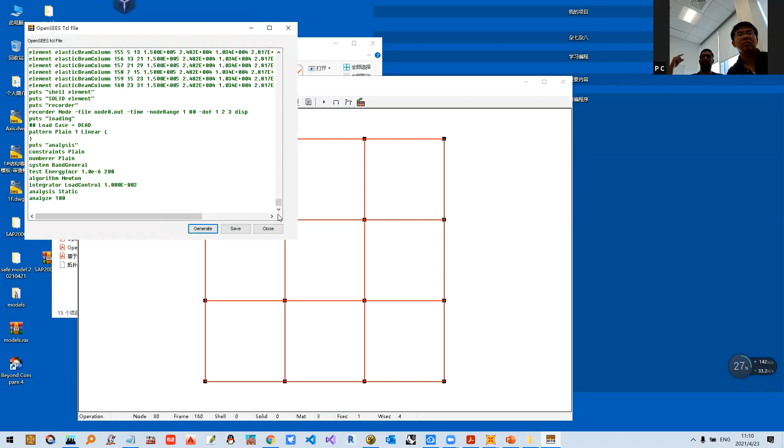Actually, we can run OpenSEES here, but we seldom use this function because we need to modify some material, some analysis code. We also need to manually modify the text file. So most of the function we use is just generate the text file and run OpenSEES.

Most likely the procedure for every program is like this. Oh, awesome, sounds cool.

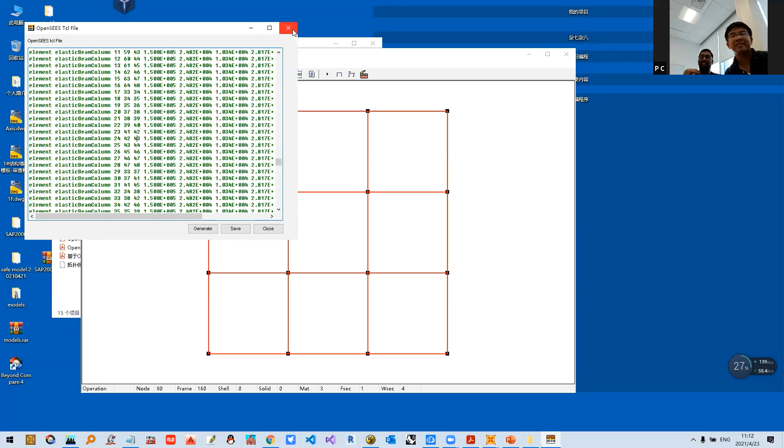Cool, makes sense, it's not total automatic. It can be automatic and some manual. Okay, I'm just trying to understand how it is. Cool, sounds really cool.